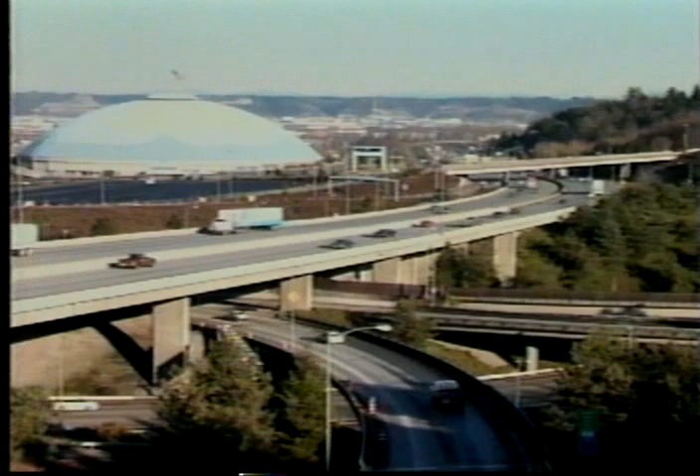Welcome to the Pavement Evaluation Training Session. The importance of the pavement rater's job cannot be overstated. Your assessment of pavement conditions on our roadways will be instrumental in establishing future maintenance priorities and requirements throughout Washington State. Your diligence and dedication to this task will give your pavement management supervisor the quality data upon which sound maintenance decisions and rehabilitation requirements can be based.

The purpose of this videotape is to supplement the Pavement Surface Condition Rating Manual and complement the instructions you're receiving from your local agency pavement management supervisor. This videotape will help you become familiar with common pavement defects and roadway safety before you go out onto the road. Session breaks have been provided throughout this videotape, allowing you to ask questions and obtain further clarification. The session breaks also give your instructor an opportunity to elaborate or comment on the material just viewed. Your instructor may deviate from the material presented to take into account local agency uniqueness, emphasis, and needs.

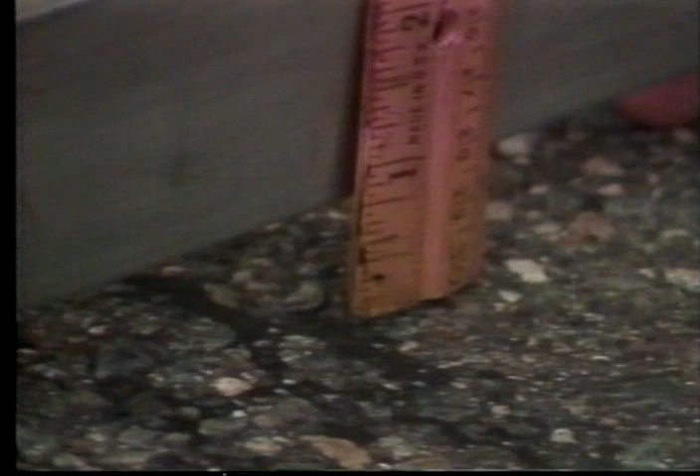Nevertheless, pavement condition rating depends on your ability to accurately assess the following elements: the type of defect, the severity of the defect, and the extent to which the road surface is affected by the defect. To fully appreciate the interrelationships of the rating elements, a basic understanding of the terms wheel path, severity, extent, and segment is essential. Wheel paths, as the term implies, are the paths traveled by vehicles on the roadway. There are 2 wheel paths per traffic lane, or 4 wheel paths on a 2-lane roadway. Severity is the measure of how badly or to what intensity a given defect has deteriorated. Extent is the measure of area, length, or count associated with a given distress. It indicates how much and how far a given defect has progressed.

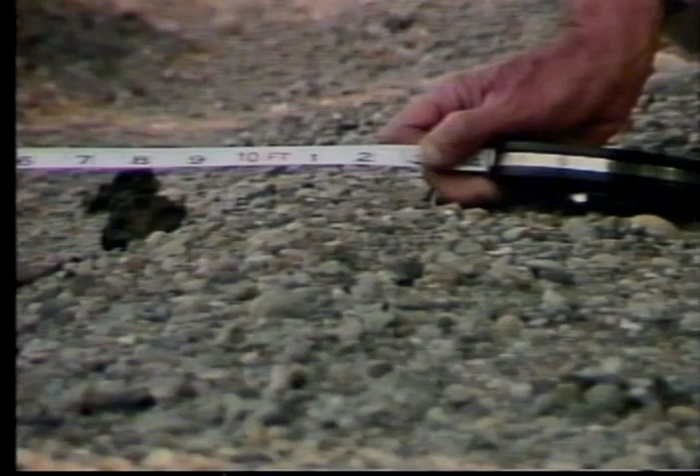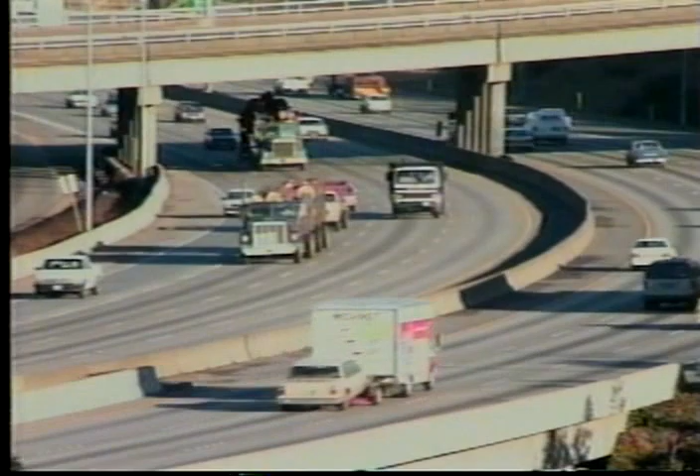A segment is generally a single block, 1/10 of a mile, 1 mile, or other relatively short unit of roadway. Segment size may vary to meet the objectives of the agency conducting the pavement condition rating. However, all pavement ratings are performed within the context of a segment. The videotape covers pavement defects associated with flexible and rigid pavements. This presentation focuses on the defects associated with flexible pavement first, and then covers rigid pavement defects later on in the program. Flexible pavement can be broken down into 2 broad categories: asphalt concrete pavement, or ACP, and bituminous surface treatment, or BST. The ACP surface appears smooth and dense with varying sizes of aggregate. The BST surface takes on a very rough appearance.

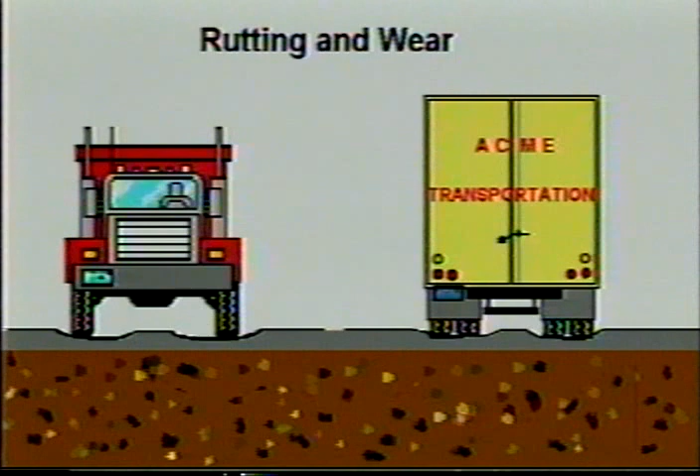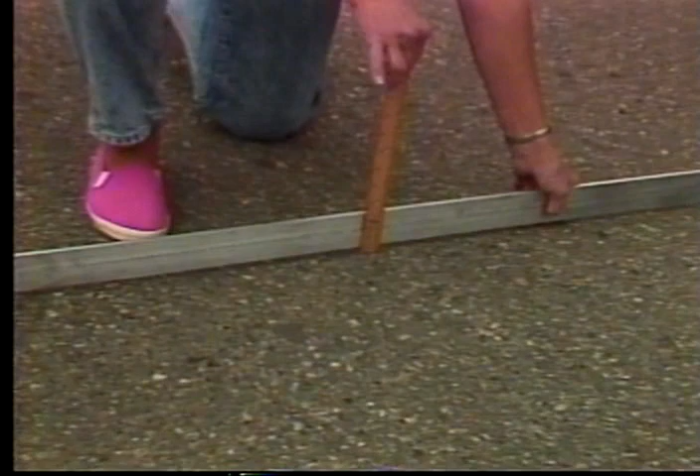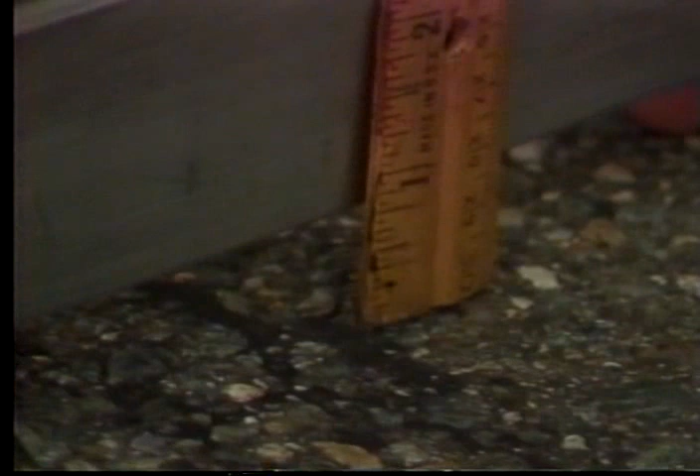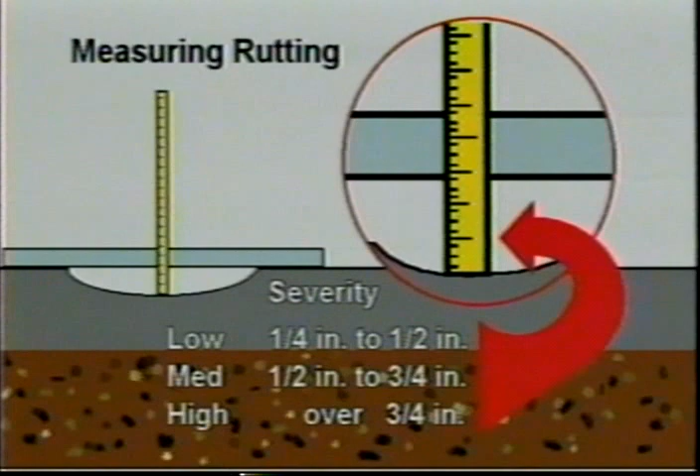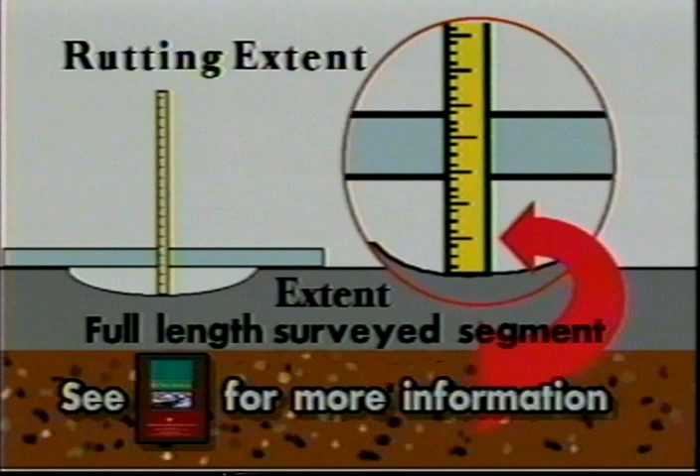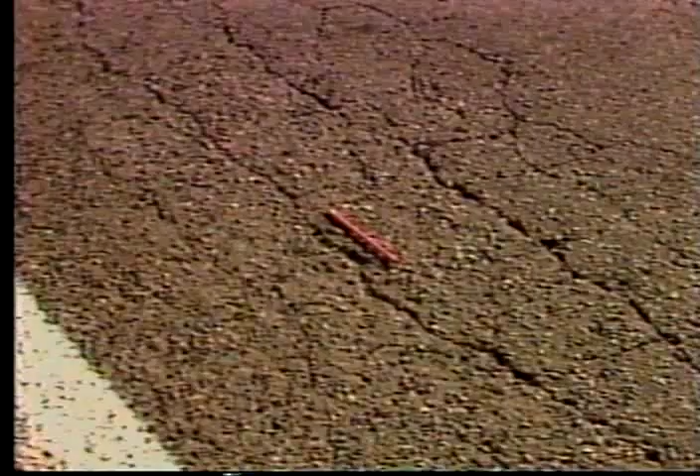Alligator cracking is associated with loads and usually appears along wheel paths. The stage at which several cracks begin to interconnect is defined as alligator cracking. Eventually, the cracks will form many pieces resembling the pattern of alligator hide. This is an example of low-severity hairline cracking. The cracks are thin and beginning to interconnect. This shows medium-severity spalling. The cracks are wider, fully connected. Edges of the cracks are irregular, with broken pieces showing. The next example is high-severity spalling and pumping. The pattern of cracking is well defined. Cracks are wider with pieces missing, and spalling is very apparent. Visible fine soil particles show in the wide cracks.

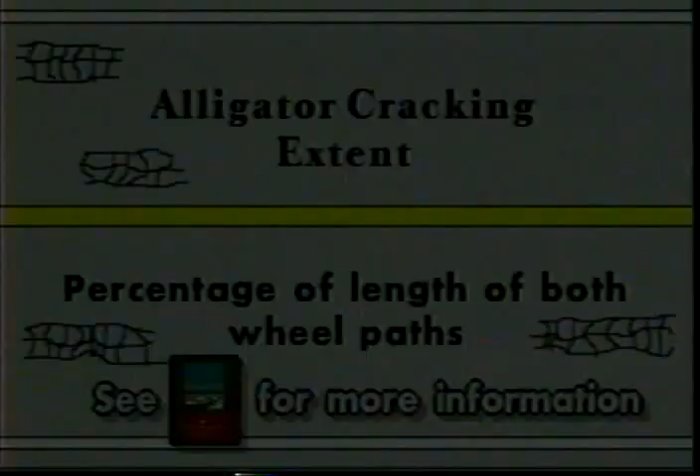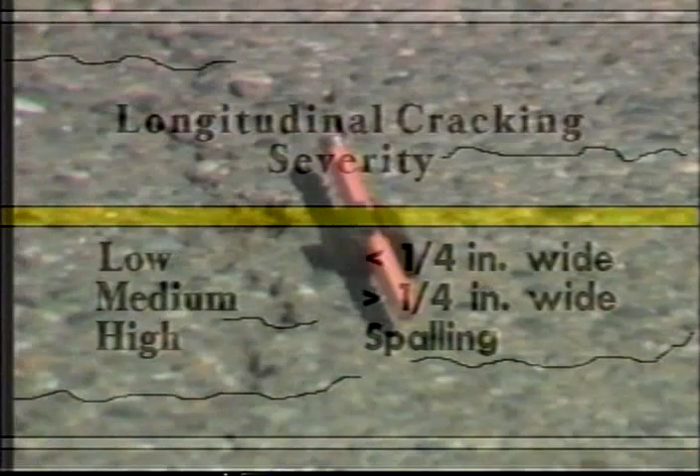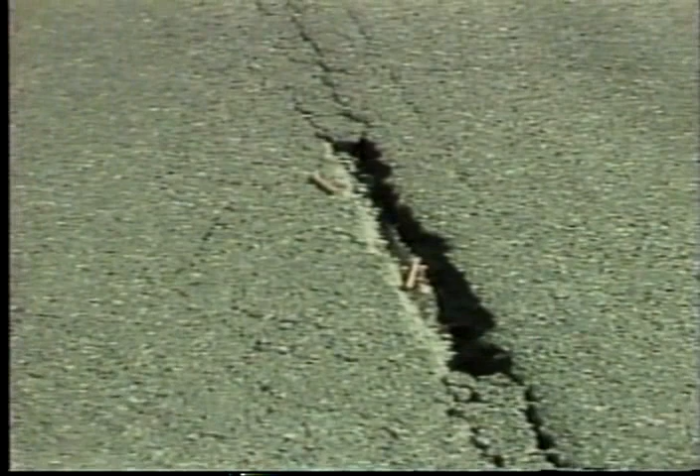Longitudinal cracking runs parallel with the roadway centerline. Longitudinal cracks associated with the beginning of alligator cracking are generally discontinuous, broken, and occur in wheel paths. This example shows low-severity longitudinal cracking. The crack is less than 1/4 inch wide. There is little or no spalling along the edges. This example is of medium-severity cracking. Spalling along the edges is still minimal. The cracking is greater than 1/4 inch wide. This is an example of high-severity longitudinal cracking. Cracks are spalled, pieces are visibly missing, and the edges of the cracks are uneven.

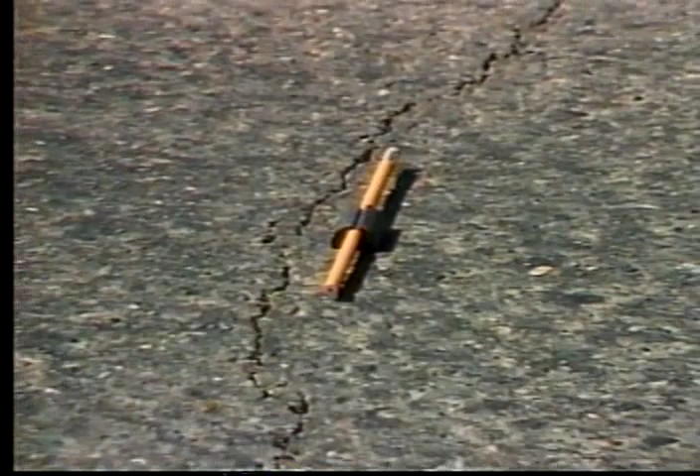Transverse cracking runs roughly perpendicular to the roadway centerline. Cracks may extend partially or fully across at least one full wheel path in the rated lane. Shown is an example of low severity, less than 1/4 inch wide crack. No spalling along the edge of the crack has taken place. This example shows medium severity cracks. The cracks are greater than 1/4 inch wide. Spalling along the edges of the cracks is minimal. Next is an example of high severity cracks. Cracks are spalled, pieces of material are missing, and the sides of the cracks are irregular.

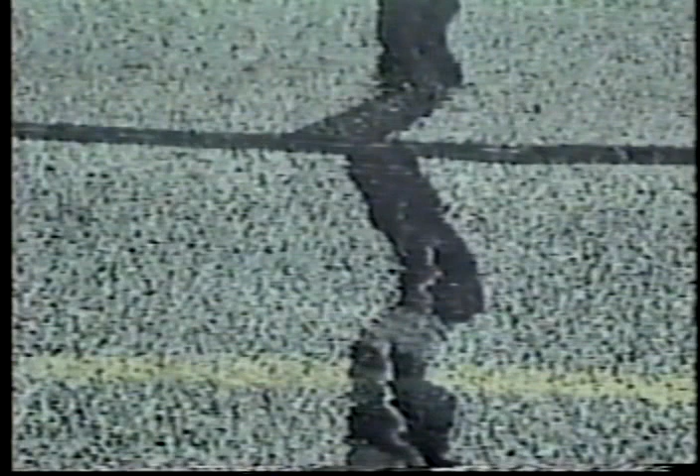This sample shows longitudinal and transverse cracking with crack sealing. While the cracks may be sealed with tar, they still have to be rated as low-severity pavement defects.

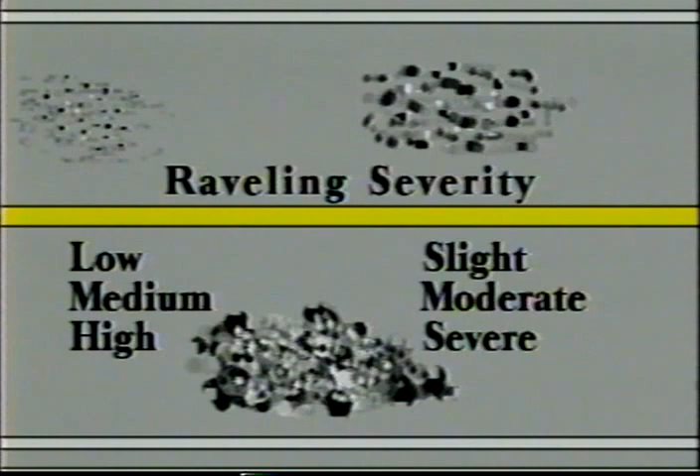Raveling and weathering are pavement surface deterioration that occurs when aggregate particles are dislodged, or raveling, or oxidation causes loss of the asphalt binder, or weathering. The smooth surface begins to appear rough like very coarse sandpaper and looks like a chip seal surface.

This is an example of low severity raveling. The aggregate or pavement surface has started to wear away, but the pavement appears only slightly rough. Next is an example of medium severity raveling. A significant amount of aggregate has worn away, and the surface is moderately rough and pitted.

This is an example of high severity raveling. The aggregate has worn away, the surface texture is deeply pitted and very rough.

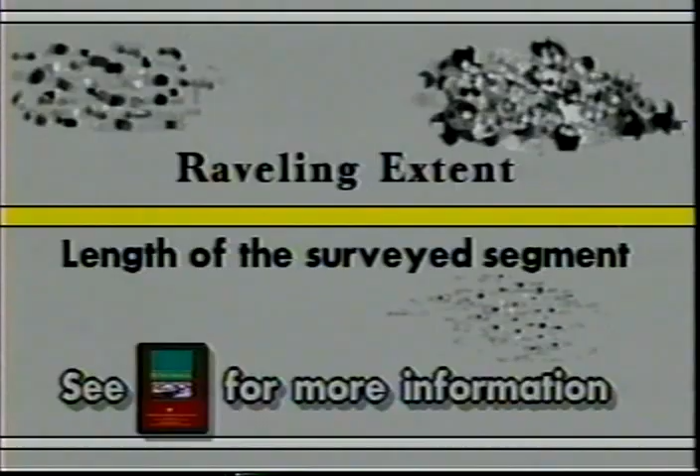Flushing or bleeding is indicated by an excess of bituminous material on the pavement surface. The surface appears shiny and reflective. This is an example of low severity flushing. Minor amounts of wheelpath pavement surface have been covered by excess asphalt material.

This is an example of medium severity flushing. Significant amounts of pavement surface have been covered by the excess asphalt material. This shows an example of high severity flushing. The pavement surface is covered by the excess asphalt material. During hot weather, the affected area will appear wet and sticky.

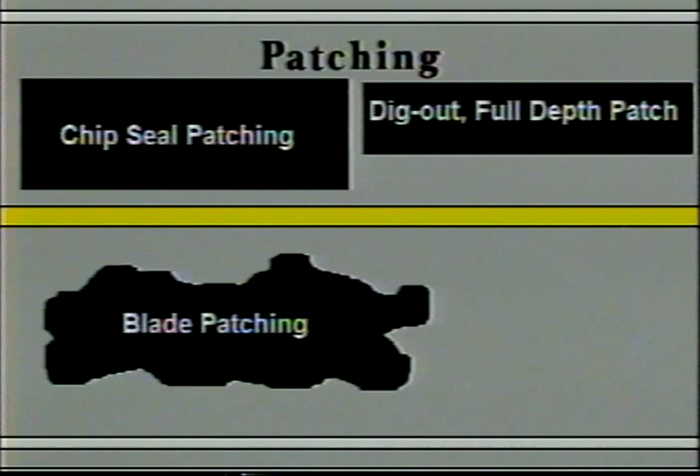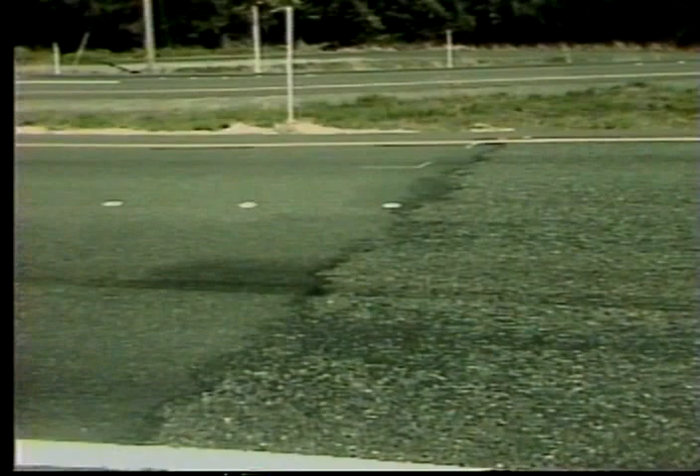In general, patches are smaller than typical rehabilitation in size and scope. They are less than full roadway width and/or less than project length. Convention defines a lane with new surfacing as a patch if it is less than a half a mile in length. Chip seal patching. This is an example of low severity patching. It's identified by its nearly straight edges and rough BST surface.

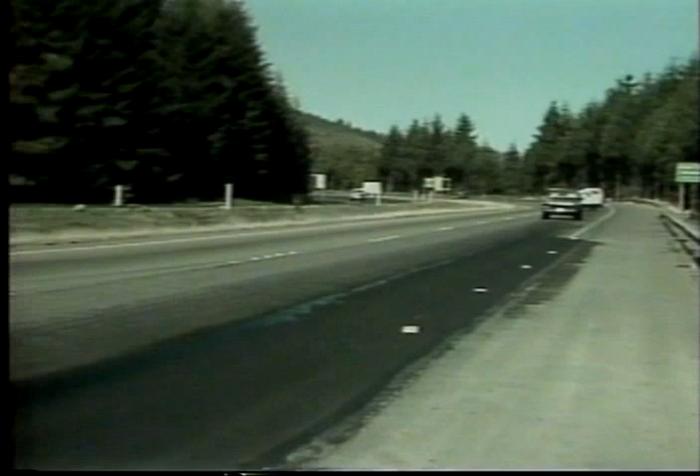Blade patching. This is an example of a medium severity patching. It has edges shaped to the contours of the surrounding pavement, is of variable thickness and smooth texture. Dig out full depth patch. This is an example of high severity patching. This type of patching is constructed by cutting out a portion of the pavement, filling the void with material and paving over. The finished surface will be the same level as the surrounding pavement.

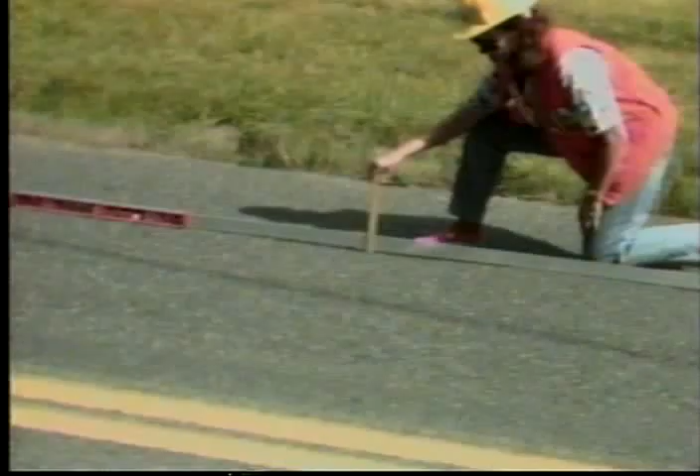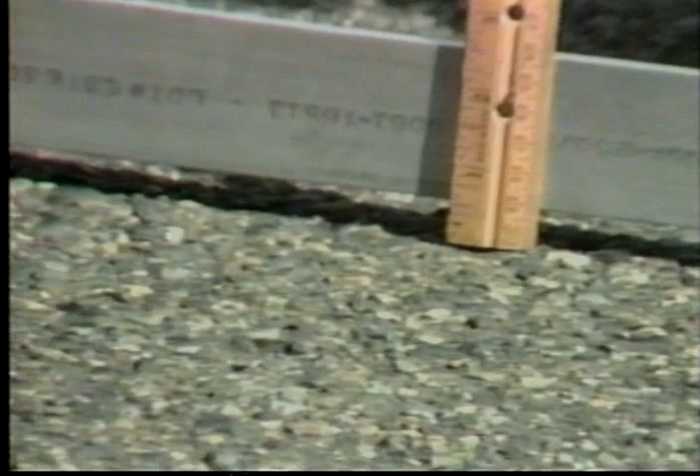Corrugation and waves are regularly occurring transverse undulations in the pavement surface. Corrugations occur as closely spaced ripples. Waves are undulations whose distance from peak to valley is more than 3 feet. The severity of corrugations is defined as the maximum vertical deviation from a 10-foot straight edge placed on the pavement parallel to the center line of the roadway.

The level of severity is defined as follows. Low, 1/8 inch to 2 inches per 10 feet. Medium, 2 inches to 4 inches per 10 feet. And high, over 4 inches per 10 feet.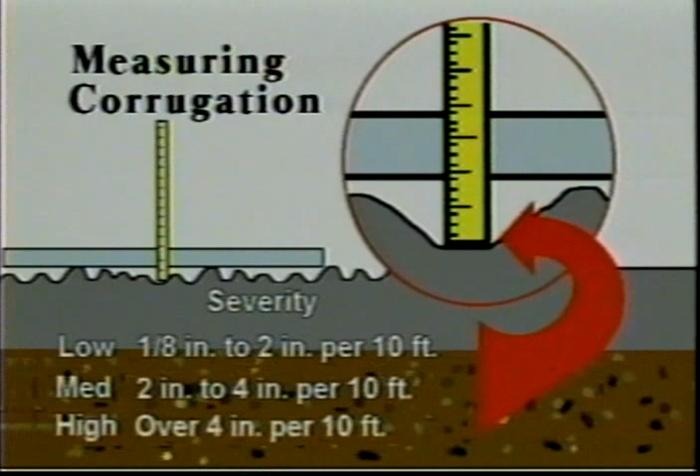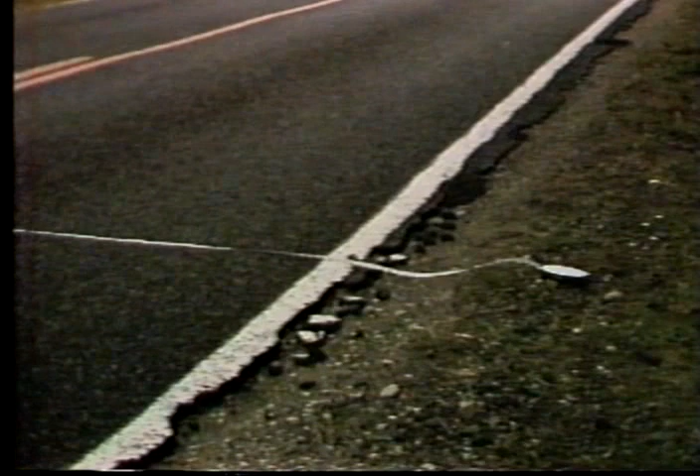Pavement edge conditions manifest themselves in 3 distinct ways. The first example is of the condition referred to as edge raveling. Edge raveling occurs when the pavement edge breaks away from the roadways, usually without curbs or paved shoulders. Edge patching, our second example, is the repair of the edge raveling defect.

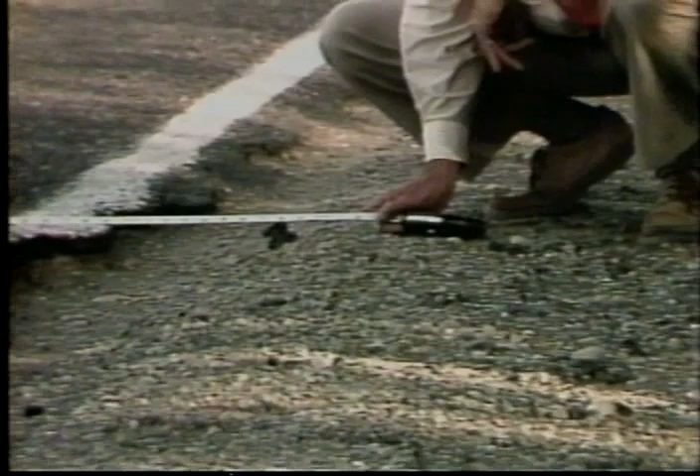Our third condition is the lane less than 10 feet distress. This distress indicates that the edge raveling has progressed to the point where the pavement width from the center line to the outer edge of the roadway has been reduced to less than 10 feet.

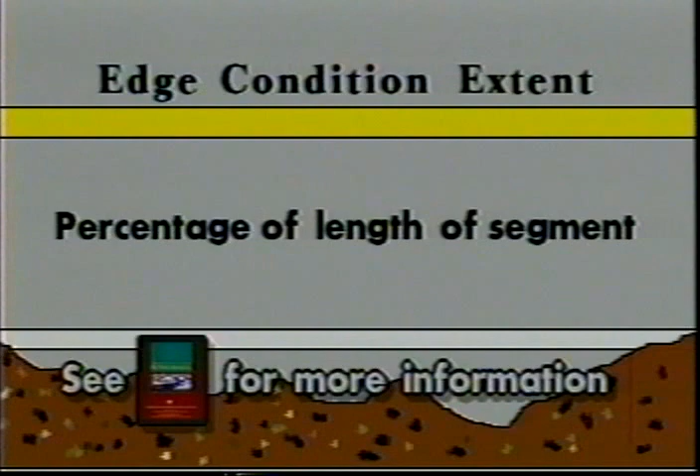We're going to stop our presentation for a moment and allow time for you to ask questions on the material just covered.

Portland cement concrete pavement is a rigid pavement that is usually placed on a bed of gravel or other free-draining material. PCCP, unlike flexible pavement, distributes loads to the subgrade due to its inherent ability to resist bending. This portion of the video will show and describe those defects found in Portland cement concrete pavement.

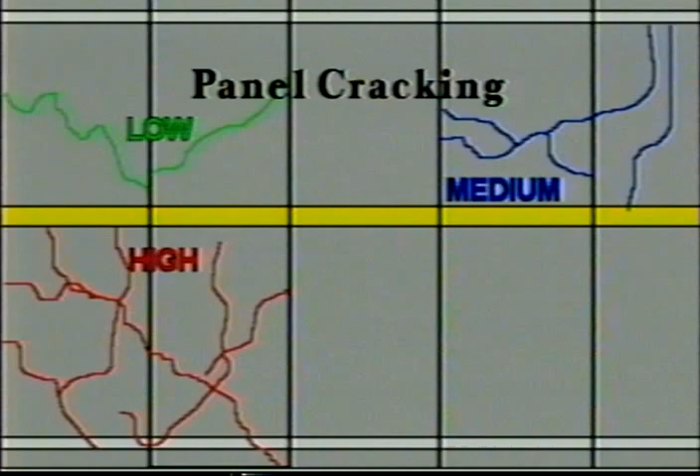The cracking defects are irregular breaks that may form transversely, longitudinally, or diagonally within a PCC panel. This example shows a low severity defect with one crack per panel. The second example is a medium severity defect with 2 or 3 cracks per panel. The third example is a high severity defect with 4 or more cracks per panel.

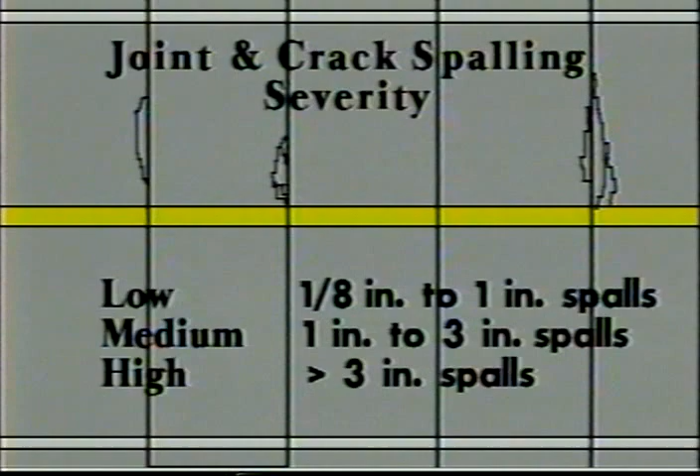Spalling occurs when fragments break or chip off along the edges of the pavement joints or cracks. This is an example of low-severity joint and crack spalling. The spalling is between 1/8 to 1 inch in size. Small fragments of pavement have chipped off, giving the appearance of an irregular joint.

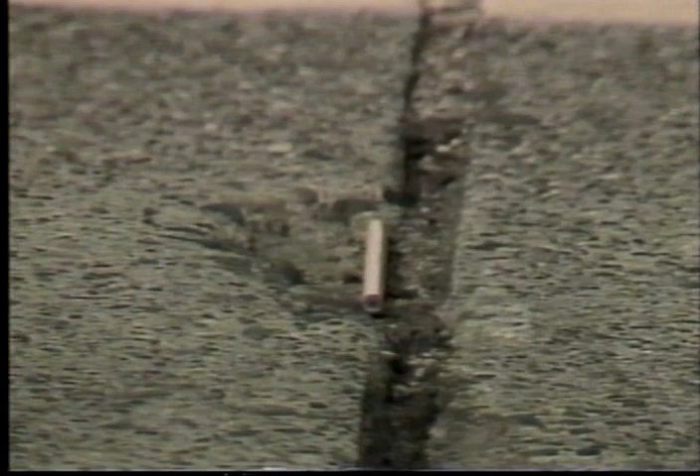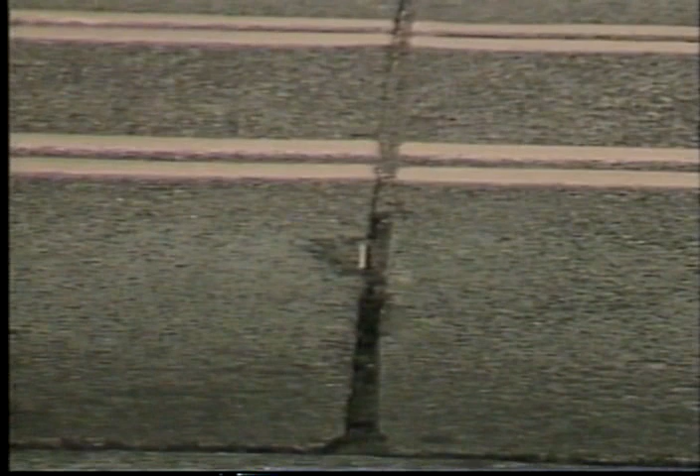Shown is an example of medium-severity joint and crack spalling. The spalling is between 1 to 3 inches in size. Fragments of pavement have broken and pieces of aggregate may be lost. This example shows high-severity joint and crack spalling. The spalling is 3 inches or greater. Fragments of pavement have broken off, and there are lost pieces of aggregate.

Pumping and blowing refer to the ejection of water from beneath the pavement caused by wheel loadings. The ejected water carries soil particles with it, eroding the pavement foundation. Pumping is recognized by the visible fine soil left on the dried surface of the roadway and/or shoulder area.

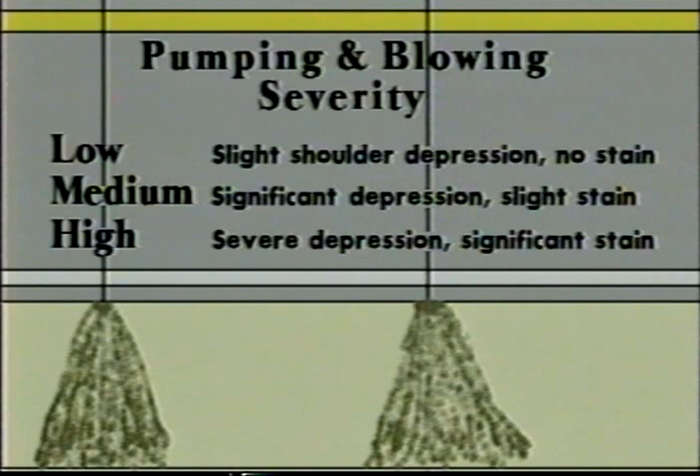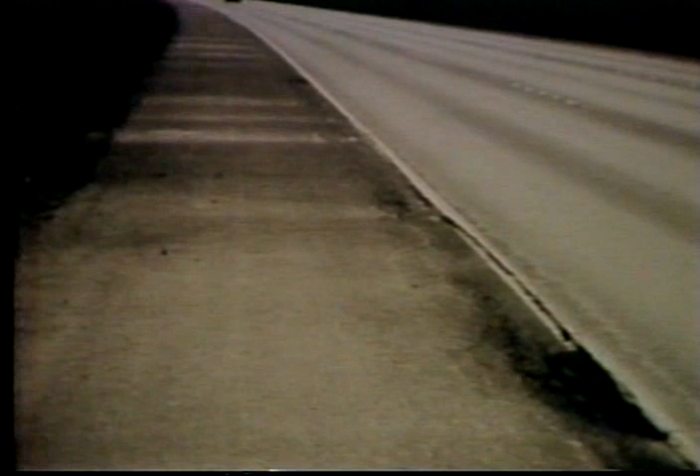This is an example of low-severity pumping and blowing. A slight shoulder depression is evident, and there is little or no staining. In this example, medium severity is indicated by the moderate shoulder depression and the obvious staining. This is an example of high severity pumping and blowing. Severe shoulder depressions and/or significant staining characterize this defect.

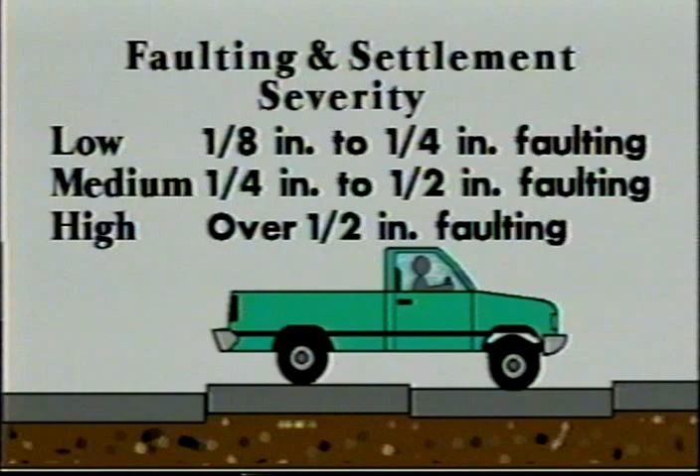Faulting or settlement occurs when abutting pavement separates vertically through settling or uplifting. The result is a step difference between the adjoining pavement surfaces. Settlement is defined as differences in height across a longitudinal joint or a crack. Usually, faulting will be found as a downward step across a transverse joint or crack in the direction of travel.

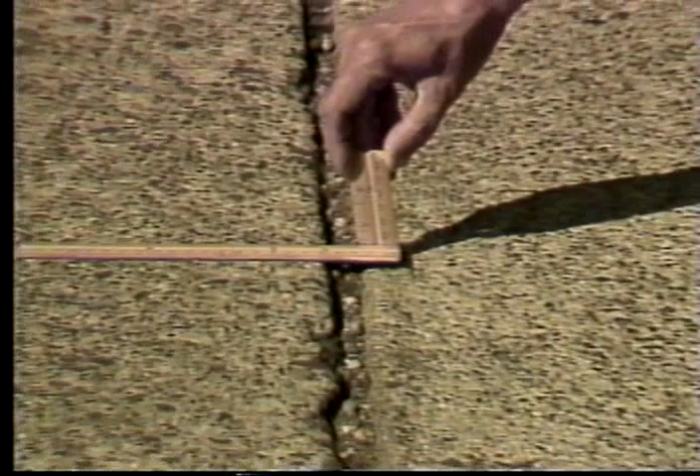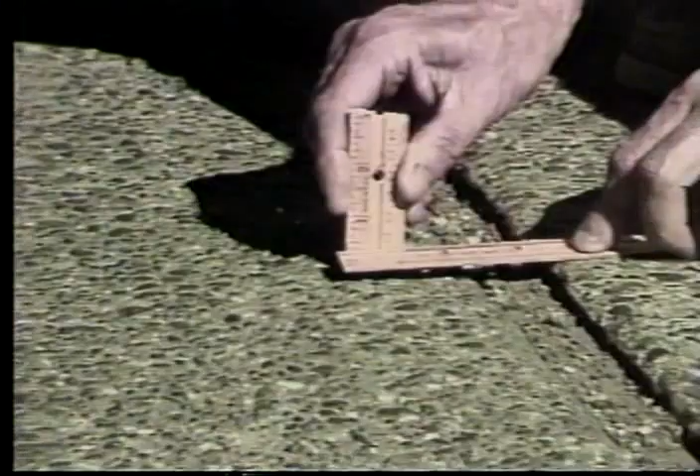This example shows low-severity faulting. The faulting or settlement is in the 1/8 inch to 1/4 inch range. This is an example of medium severity faulting. The faulting or settlement is in the 1/4 inch to 1/2 inch range. This example shows a high severity faulting defect. The height difference between panels is over 1/2 inch.

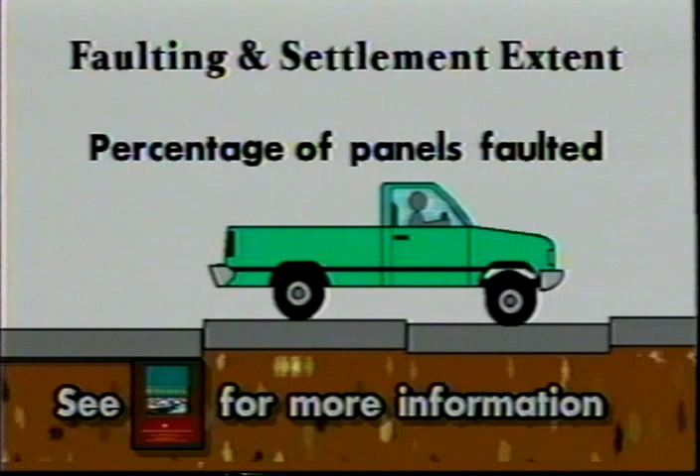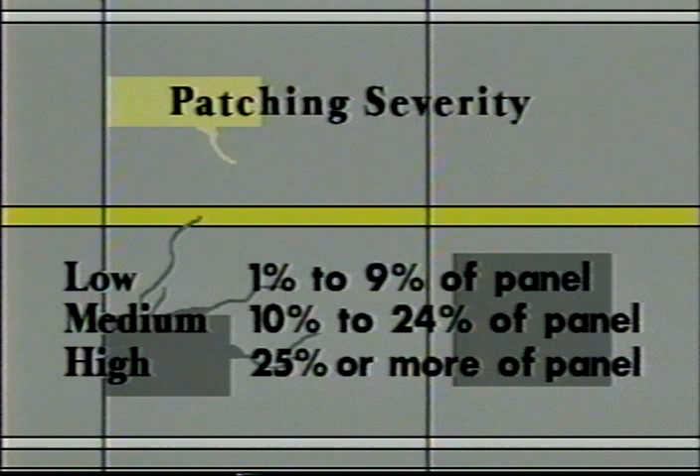Patching is the temporary or semi-permanent replacement of all or part of a PCCP slab with a flexible or rigid material. A new full-size replacement slab is not considered a patch. This example shows low severity patching. Between 1% to 9% of the panel is patched. This is medium severity patching. Approximately 10% to 24% of the panel is patched. This example shows a high severity defect with 25% or more of the PCC panel patched.

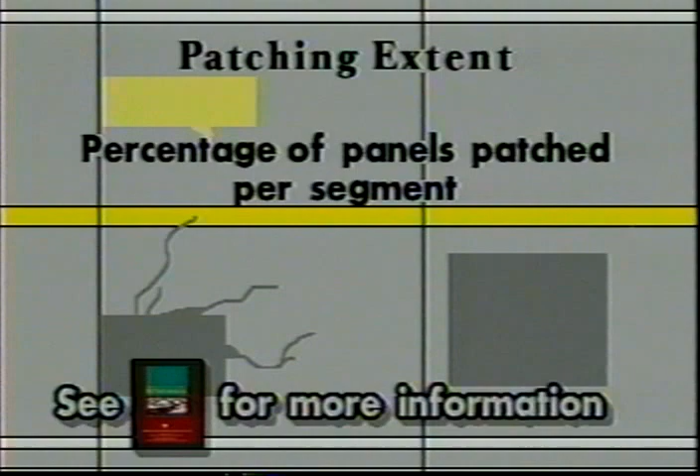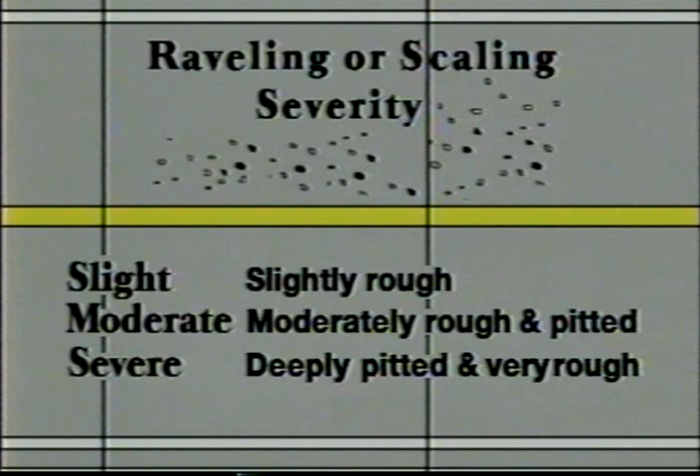Pavement scaling is the progressive disintegration of the pavement from the surface downward by the dislodgement of surface particles. In severe cases, the surface is very rough and irregular. This example shows a slight severity defect. The aggregate or binder has started to wear away. The pavement appears aged and slightly rough.

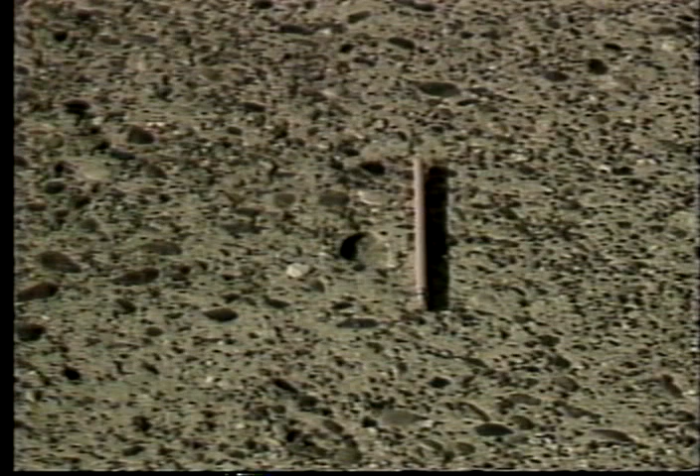This is an example of a medium severity defect. The aggregate or binder has worn away, and the surface texture is moderately rough and pitted. Loose particles may be present, and fine aggregate partially missing from the surface. This example shows a high level of severity. The aggregate has worn away, and the surface texture is deeply pitted and very rough. Aggregate may be missing from the surface.

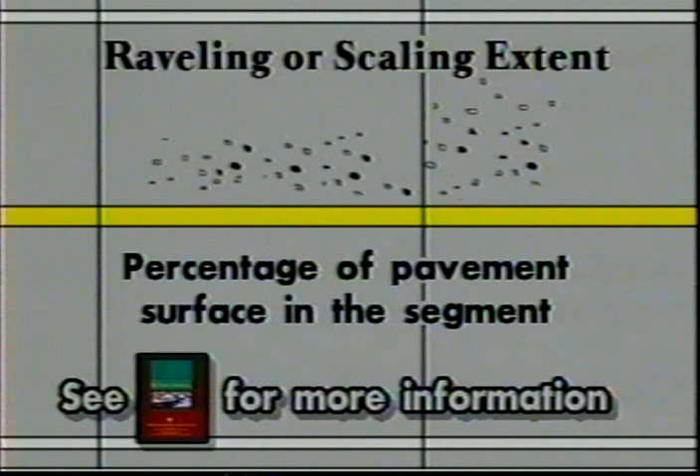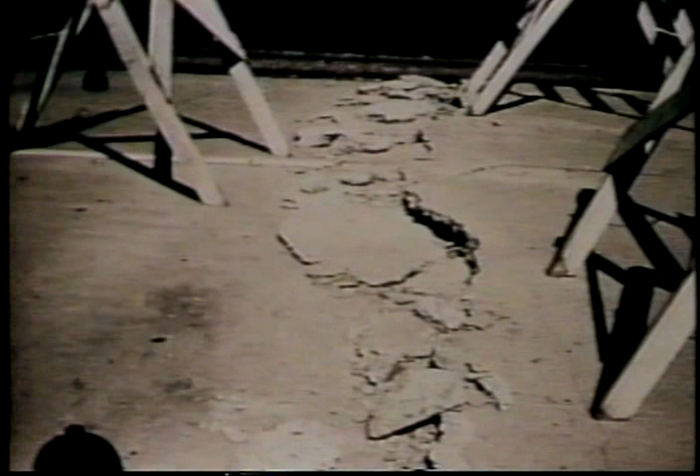Blow-ups are the upward buckling or shattering of pavement panels at transverse cracks or joints. The occurrence is caused by the expansion of a panel when all available room for expansion has been previously taken and the panel is tightly confined. This is an example of a blow-up. Notice the severe damage to the PCC panel. There are no severity levels associated with this defect. Each occurrence per segment is counted and recorded. This is an example of a blow-up that has been patched. The patch is included in the patching category.

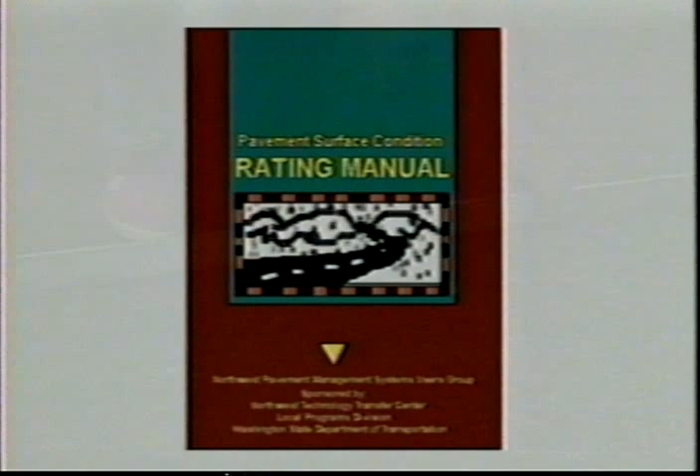Estimate the extent of roadway damage in accordance with the guidelines found in the Pavement Surface Condition Rating Manual, as well as the instructions given to you by your local pavement management supervisor. Good pavement rating results depend on a rater's ability to properly identify and classify the severity of road defects. Misjudging the severity of road defects will result in an overstatement or understatement of actual pavement deterioration. To obtain the best possible results and minimize visual perception errors of actual road conditions, do the following. Schedule and time the pavement evaluation survey so that, depending on your mode of conveyance, you drive, ride, or walk into the sun whenever possible. This will prevent shadows from hiding cracks in the roadway surface, thereby understating the extent of roadway deterioration.

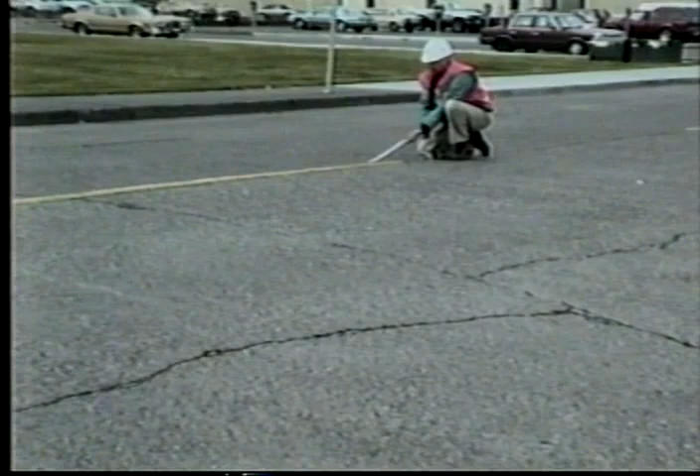Know the length of your stride, the length of your vehicle, the spacing distance of the centerline markings. These yardsticks will serve you well in approximating the extent of the roadway damage. Conduct the pavement survey only when the pavement is completely dry. Cracks do not dry out as fast as the roadway surface. This gives the illusion of greater damage than actually exists.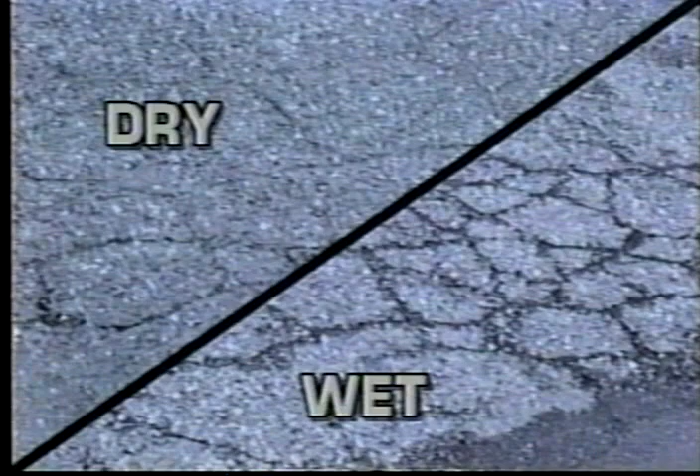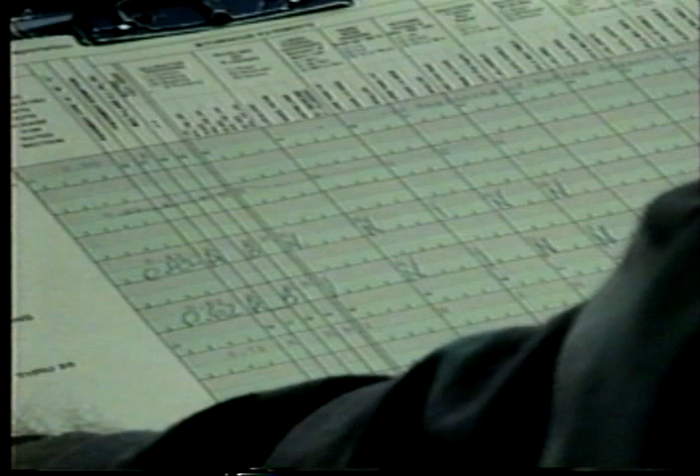The information you gather during the pavement evaluation survey is captured on a pavement condition rating sheet. Since each local agency may have its own unique format, the pavement condition rating sheet will not be discussed. Your local agency pavement manager will instruct you on how to complete the form used by your agency during the next session break. Your instructor will also tell you if you are rating the entire roadway or simply the lane you are traveling in, if the extent of road surface damage is to be expressed in terms of percentage or feet per mile segment, meter per kilometer segment, or some other standard.

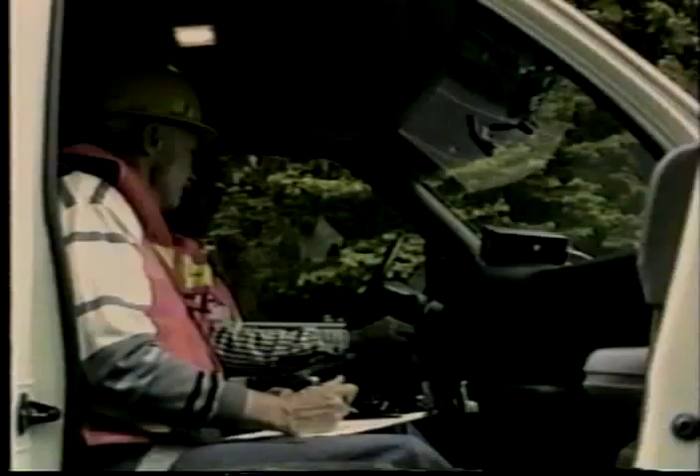During the pavement evaluation survey, you will be traveling at speeds considerably less than the posted speed limit. This could be hazardous if you don't put safety first. Always wear your seatbelt. Turn on the roof-mounted light bar and make sure its warning lights are operating properly before putting the vehicle in motion. Drive on the shoulder as much as possible to keep from interfering with the normal flow of traffic. Be alert to what goes on around you and drive defensively. Always wear your hard hat and safety vest when you get out of your vehicle.

If you are conducting the pavement evaluation survey on bicycle, be sure you wear an approved bicycle helmet and traffic safety vest. Equip your bike with a bike flag to enhance your visibility. Ride on the shoulder with traffic rather than against it. Be aware of your surroundings at all times and ride defensively. If you're conducting a walking survey, stay on the sidewalk or shoulder whenever possible. Venture into the roadway only when traffic conditions allow you to do so safely. Wear your hard hat and traffic safety vest at all times. Remember to stay alert, put safety first, and help make this the safest pavement evaluation survey ever.